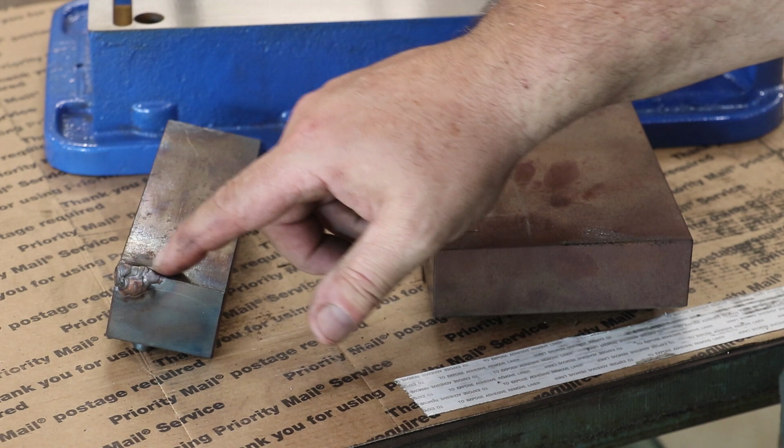And in the meantime, we're going to get back on and start working on getting these things cleaned up. Let me zoom you in here and show you what it looks like with the job finished. So on the fixed jaw here, I think we had where a milling machine cutter had gotten into this, so Jim built that up, and you see he left plenty of material for me to take off. He didn't want to have any voids or anything in there.

We had a little drill hole here, he plugged that up, and then over on this side again, we had some places where a milling machine cutter had gotten into it. This one is some kind of steel. This jaw, the movable jaw, had, I think, a hole in it back over here. We counterbored that and filled it all in, and then also filled up some places here.

I also have just a real light milling cutter mark here. I told him we weren't going to try to fill that in, because once I get all this back on the vise, I'm going to grind the tops of these flush with one another. And I think we will just grind this down and actually grind that out to get that cleaned up.

So next step, what are we going to do? I could take this over to the milling machine and kind of knock most of that off. But quite honestly, I think we're just going to do all this over on the surface grinder. It's going to take a little bit extra grinding, but I think that's just what I'm going to do. So let me get this over here on the surface grinder, and we're going to start cleaning these up.

First thing I want to do is get the two faces parallel with one another. Then we will work on getting the sides done. The sides need to be fairly square. I don't know that it's absolutely critical that they're dead nuts perfect, but we want to get them as close as we can.

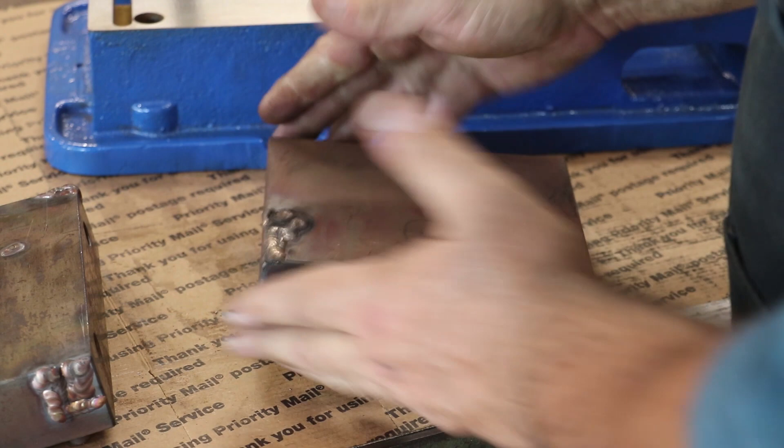And then of course the top we'll do on the vise. And same thing over here. We will get the two faces parallel. We'll get the sides done, and then the top we'll do over on the vise. So I'm gonna go set this up on the surface grinder and do some more grinding.

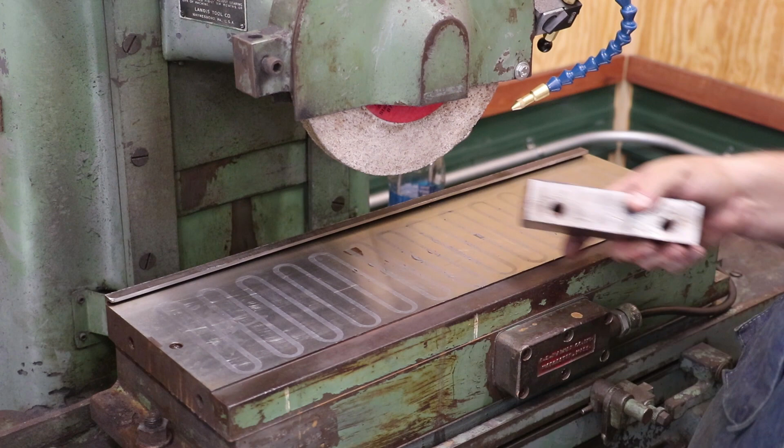All right, we're back over here to the surface grinder. I've got the fixed jaw, and first thing I did was I took a stone and stoned this down, and there were definitely some dings in here. And I just made sure that I stoned it until I was getting good contact all the way across. You know, that just kind of took off some of those burrs that were on here.

My magnetic chuck is clean. I'm just going to bump this up against the fence in the back and turn the mag on. And this should be ready to go. So we'll come in here and touch off on it and start grinding. Let me oil this thing up and get it ready to go.

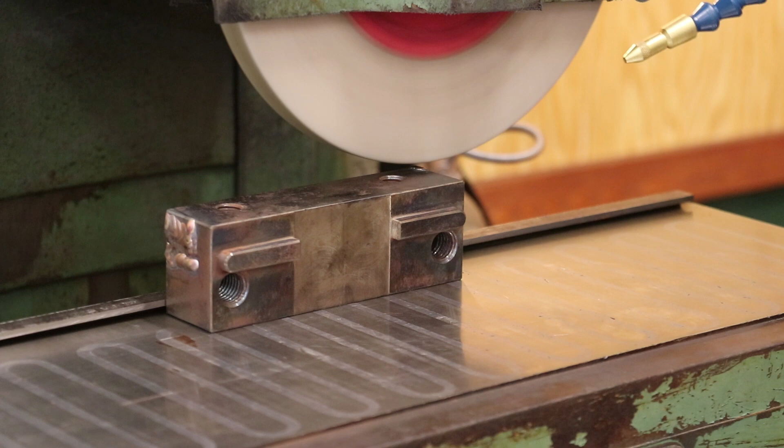All right, we're gonna start by just hitting that high spot there, which is where the weld is. It's gonna come down until I'm just touching it right there. Turn on some coolant here. And we're just gonna probably do this part by hand here.

I'm not hitting anywhere else on here yet. And now I am. I appear to be. Alright, we're touching all the way across now, or pretty much all the way across.

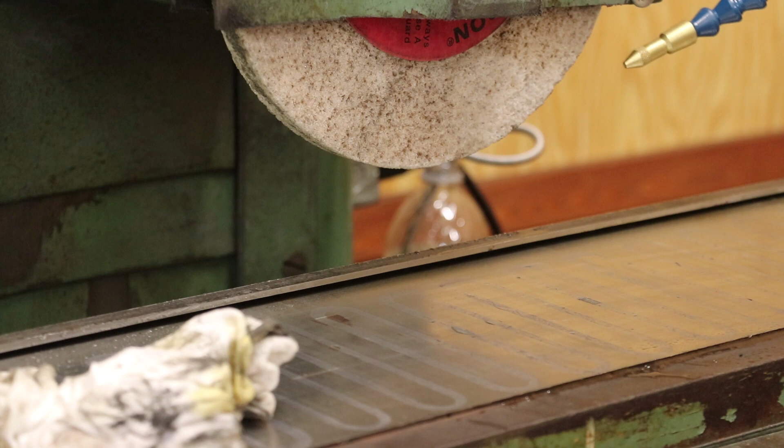Flip it over now and grind it parallel to the other side. And we'll come in here. Mag that on, and we should be able to start where we left off. I'll just make a pass there, and then we'll just get that ground down until it cleans up.

Happy with how that is. There's a couple little scratch marks in there, but I'm not going to worry about them. So I'll just go back across that and let it spark out. All right, I'm happy.

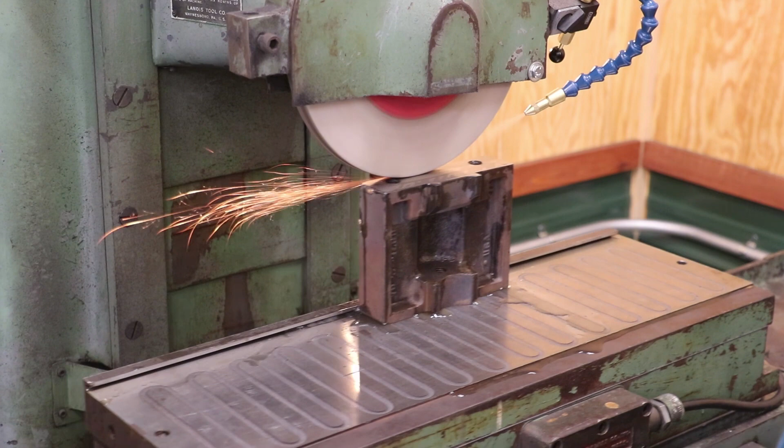So now we're going to do the movable jaw, and it gets the same process. The other side's been stoned, chuck's clean, put it down, and we'll just do the same thing here we did before. I think that pretty well got it, so we'll just spark back across there.

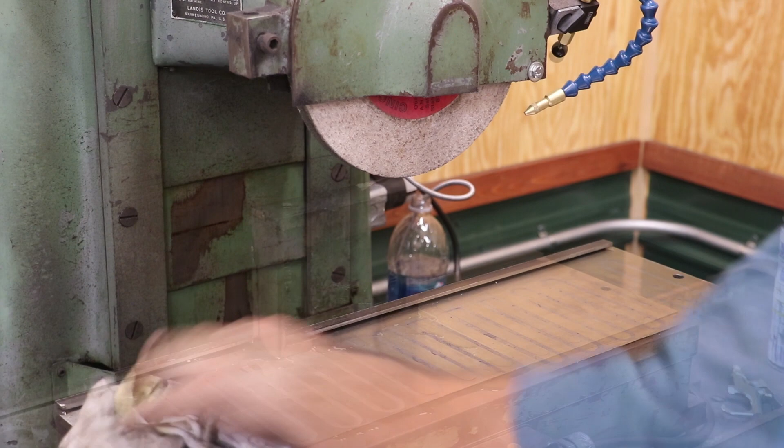Well, we've been doing some grinding off camera, but I've got all four sides of both of these all ground flat and square. Same thing with this one. I'm not going to do the bottoms. They're pretty much original surfaces, and the tops we will grind once we get it all on the vise.

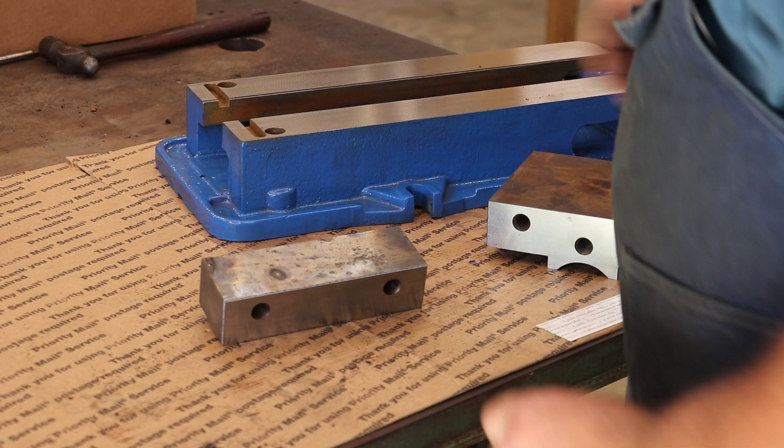So this is getting ready to start to go back together. So my fixed jaw will go there. My movable jaw, actually I think it'll go this way, but it's really coming together. So I got my rebuild kit in. Let me get that all put out here, and we will start reassembling this. I think we're going to go ahead and start putting this thing back together.

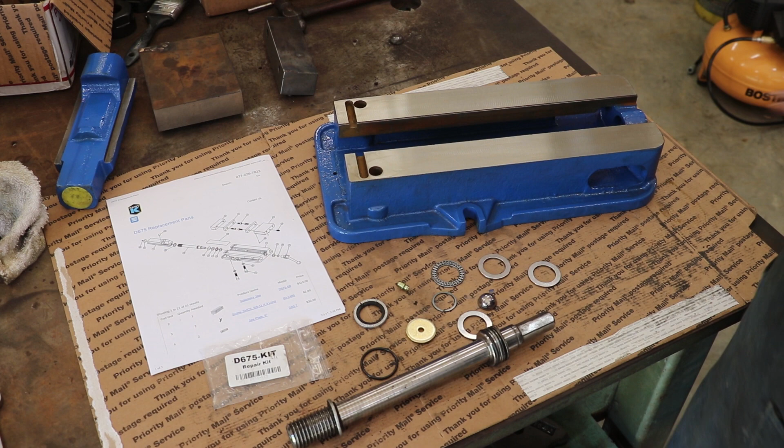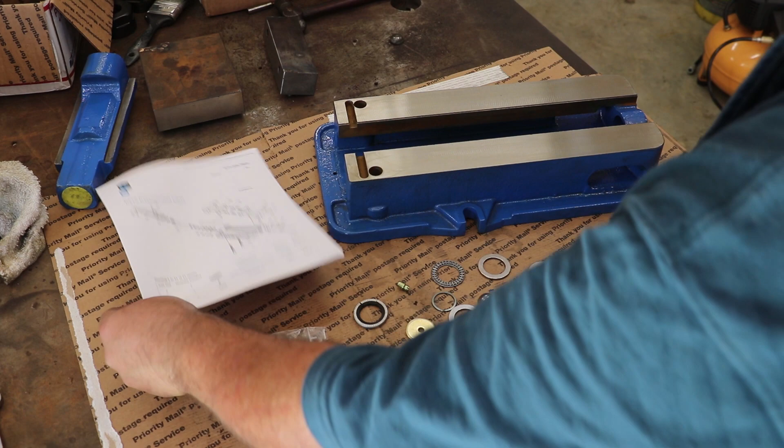I will mention that I went to the Kurt website. I ordered the repair kit, which is basically the hardware for the things that need to be replaced when you redo one of these. And I think it was like 15 bucks. It wasn't too bad. I also have a parts diagram here. See, I got one that's blown up. I'll put that one up here. You can kind of see what we're doing.

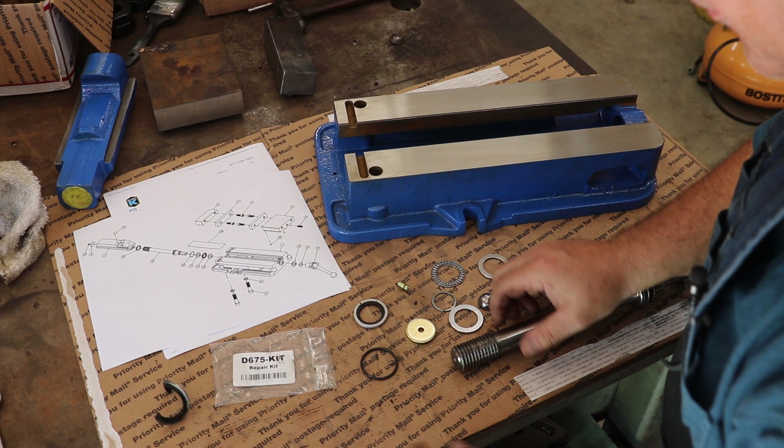So first thing we need to do is get this piece back in. Before I do, there's a couple of pieces on here we need to replace. So there's this little split washer looking piece here that's got a brush in it. I'm just going to pull the old one off. Here's the new one. And let's see if we can get it on here without messing it up too bad. You know what? I think I'll just screw it on here.

Next are the thrust washers, and there's an O-ring on here. I'm going to pull the old ones off. We'll start by putting the new O-ring on. Okay. Now there's a washer here. It goes up on here like such. Then we've got a little thrust bearing that goes in here. And let me grab some oil. And I'm just gonna oil that up real good.

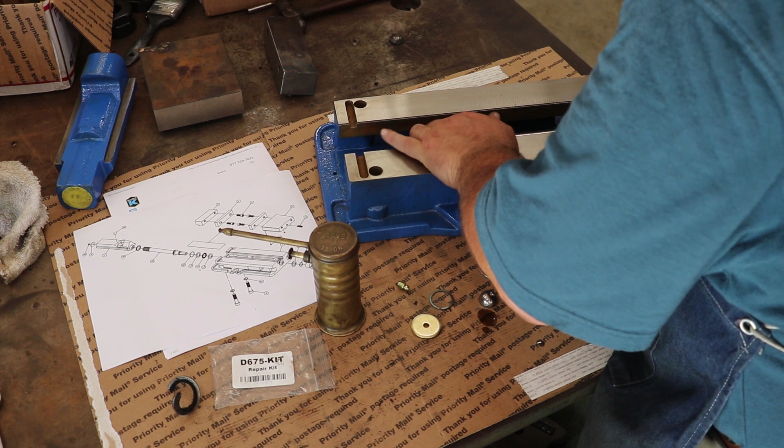And then another washer goes behind it, so that thrust bearing kind of goes in between two washers, and then this whole piece just kind of comes up in here like such. Where's my dead blow? All right, we need to kind of get that O-ring up into the hole there where it goes.

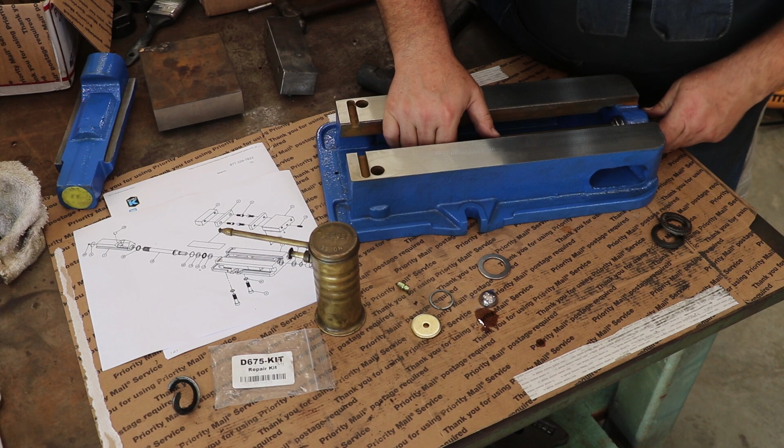It's got to go in there. All right, let me study this a minute. Something's not right. You know what? There's a washer that didn't come out that's up in there. So let me get that washer out. That will explain why it's not going up in there far enough.

I'm sorry, folks, but I turned the fan on. I know people complain about my fan noise, but I see I'm looking over there. It's over 90 degrees out here in the shop today. It's really not that hot, but man, it's just humid as can be. The water's just coming out on me, sweat. So anyway, deal with the fan.

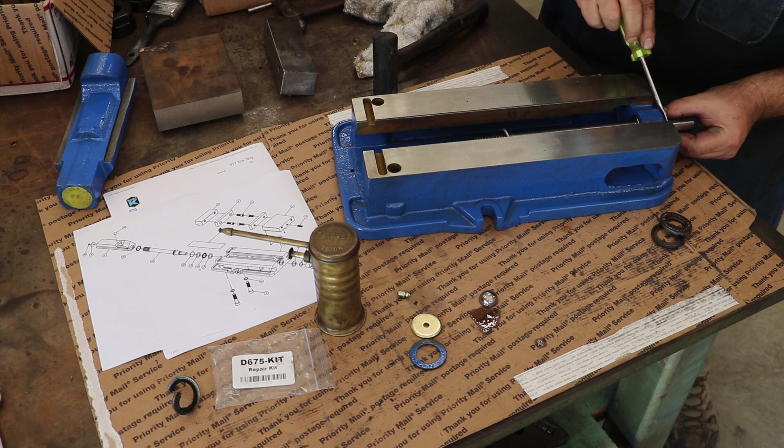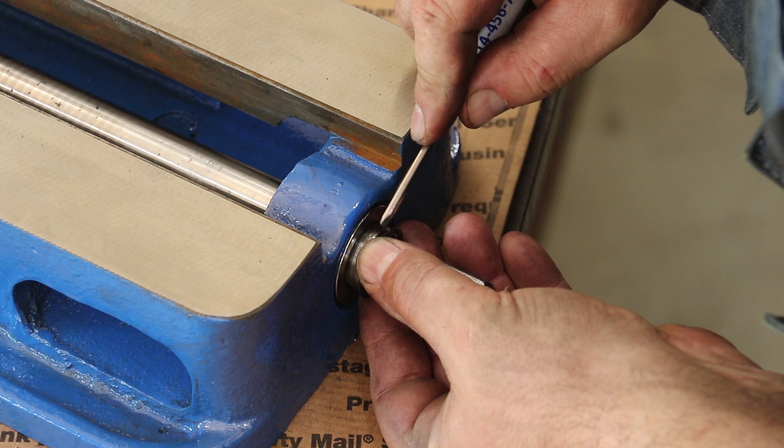All right, much better. So now I can put the washer on the end. And again, this is a spiral snap ring. It goes on here, and I just kind of have to expand it out to get it up into that slide. I think they actually make a tool to install these. I don't have one. I need a smaller screwdriver. We'll move the camera down here where y'all can see this a little bit better. But we'll get that kind of started over in there and just kind of work it around.

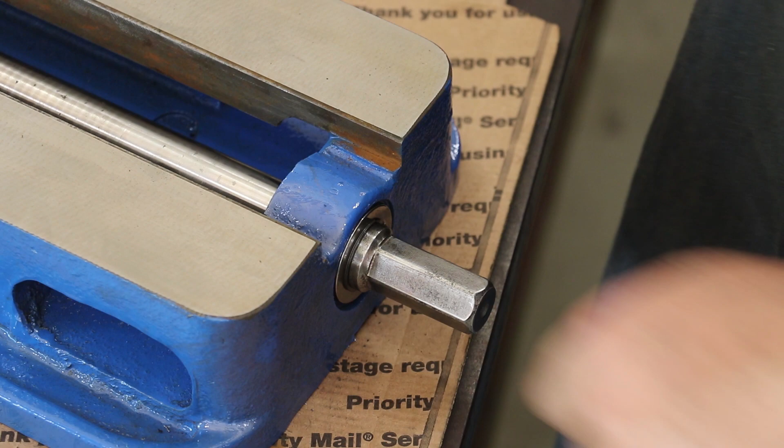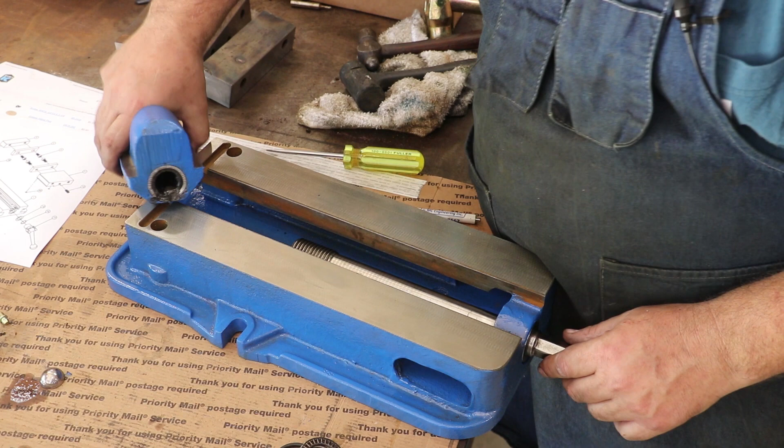All right, that's in there, and that will hold that in place. Okay, very good. So we're ready to install the screw here, or the nut. A couple of comments. First off, that little brush that I slid up onto the shaft, it actually presses in here. I got to look at the drawing and I realized that's what it does. It's got a little nylon brush on here, and that keeps the chips from getting up into the nut, which is actually a pretty cool little feature. And I also squirted some grease up in there to go ahead and lube that up.

This piece slides in here like such. And when I ordered my rebuild kit, I ordered me a handle for this vise because it didn't come with a handle. Yeah, that brush is doing a good job. So I went ahead and just ordered one. Kurt has, I think, a $25 minimum order, and the rebuild kit was only 15 bucks. So the handle, I think it was like 20, 25 bucks or something. I can't remember, but I just went ahead and got it.

Next step here is to put the movable jaw on, and the way this works is you got a little 45-degree angle in here, and I don't know if you can see it, but up in here there's a matching 45-degree angle, but there's a little half moon radius in here, and what you get is this little half ball. It's a little steel ball, and it floats in there so that when you tighten it up, the flat of this ball hits the flat of this 45, and it pivots on there, so you got a nice self-centering. It's going to roll around on that.

Now, one thing people recommend you do to hold that in place is just take a little dab of grease. It also gives it some lubrication up in there. So I'm going to put a little squirt of grease up in there, put that in there like such. And then you just come in here and that holds that in place. And next there is a set screw that goes in the back here and right here, and that basically tightens it up onto that. I'm going to go clean this up real quick and we'll install this little jewel.

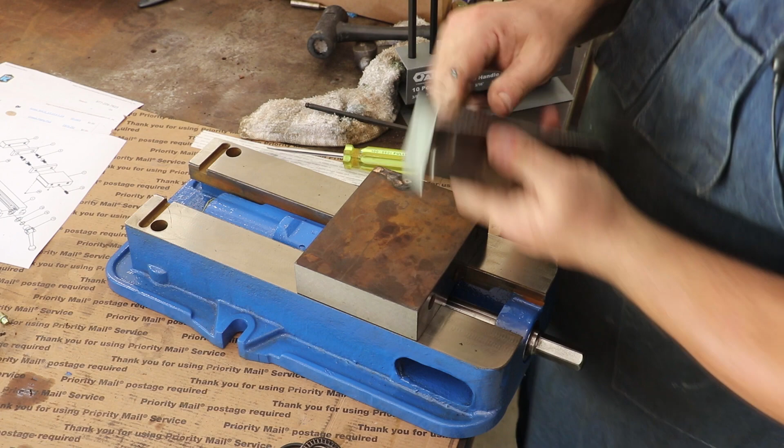All right, that should have that locked down. And there you go. The movable jaw is moving. Just what we want. Very good. Now, we are going to install the fixed jaw here. And what I'm going to do is just put a little oil in here.

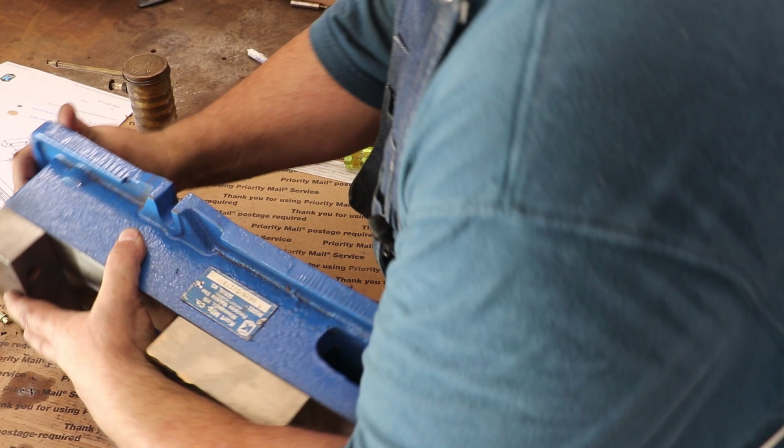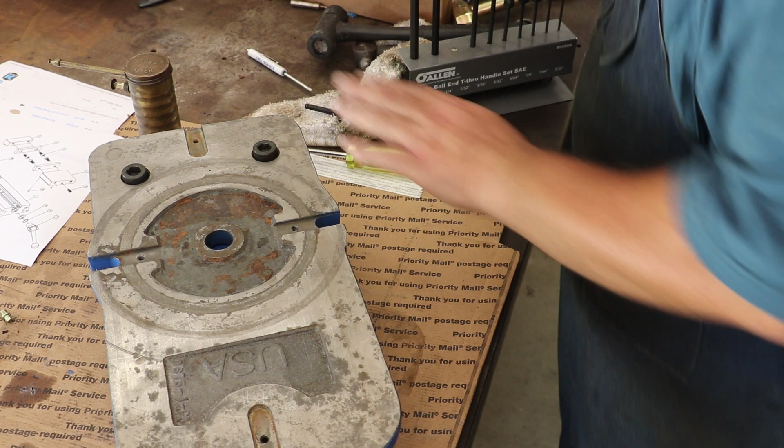And for that, we're going to flip it over. And we got two socket cap screws to hold that in place, and there is a little lock washer thing in the bottom there. And we go get a big enough hex key to put those in. And I think we'll torque them down like such. That should be good. All right, flip it back over. And it is starting to look like a vise.

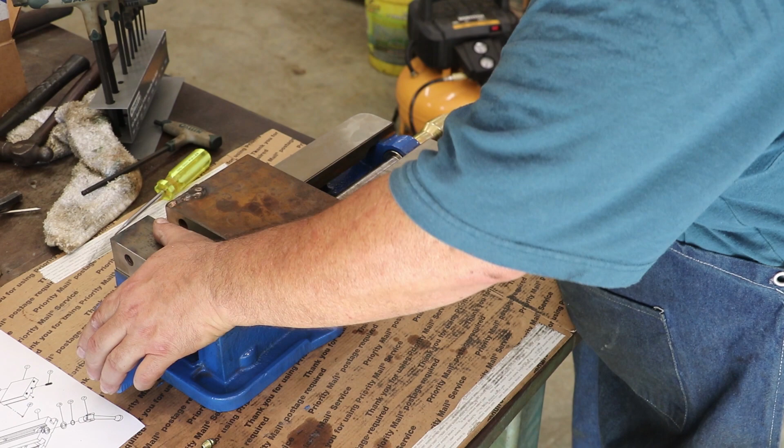So that's as far as it goes without having vise jaws in there. So I think what I'm going to do is I'm going to take one of these vise jaws. We're going to grind these before we put them in here, but I'm just going to put it in here. What I want to do is I want to tighten this up so that when I grind the tops of these, I'm grinding it under pressure, because that's how we'll be using the vises, under pressure.

And the next thing for me to do is take this back over to the surface grinder, and we are going to grind the top down, and we'll pretty much have this vise all ready to go. So let me go get that set up on the surface grinder. Another grinding job.

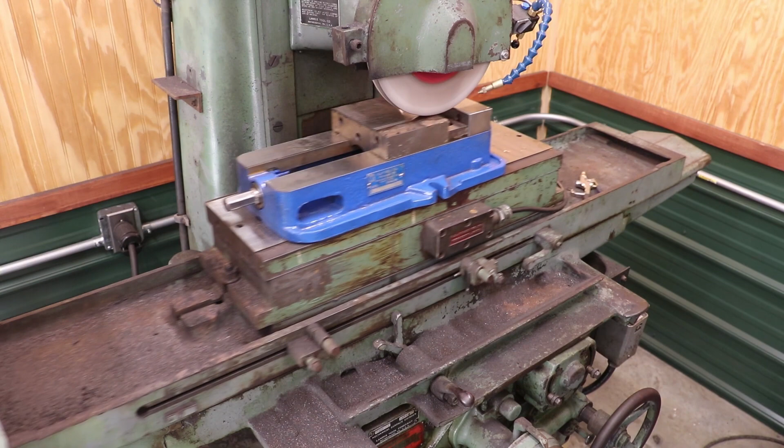First pass done. We're going to feed down another thousandth. Come back across. It actually cleaned up pretty well, except we got a couple of little boo-boos in here we're still cleaning up. And of course, this area back here, we're going to have to go down a little bit deeper to get that worked out. But really just a thousandth pass cleaned most of it up, which tells me it was pretty flat to start with.

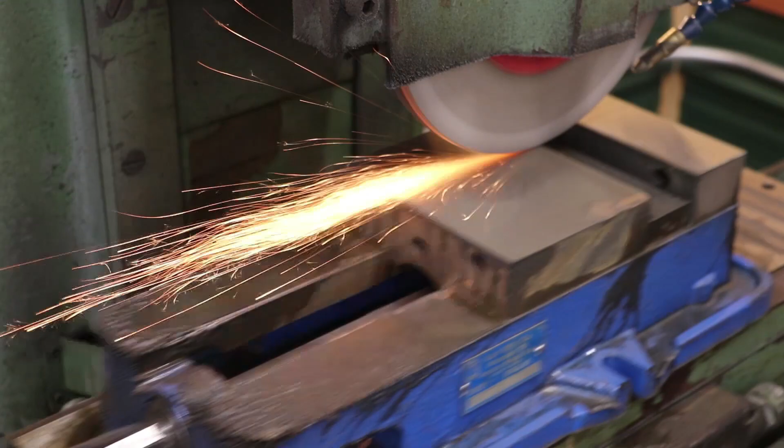Well, we should be taking our last thousandths off of it right now. It took 15 thousandths to get it completely cleaned up. We had a little place over here where a milling machine cutter, end mill had gotten into it, and I just wanted to get all that out. So anyway, 15 thousandths, cleaned it up, and this should be the last pass. I'll probably let it spark back across without feeding it down after this pass. And the finish still looks good. So taking some time, but he's looking good. Almost done.

Well, there you go, off the grinder. Everything's nice and smooth. I did hit the edges here with a file, and I just ran a stone over the top to deburr it, so it kind of messed up the surface finish a little bit, but it's flat, man. It's good. It's fine. So all that's left now to do is I've got the jaws in here, and I want to give those a fresh regrind as well.

Put those on. I'm through for today. It's about 6 o'clock, and my wife's wanting to go out to eat dinner. I'm gonna go take a shower, and probably tomorrow evening we'll get those ground, and this Kurt Vise will be finished.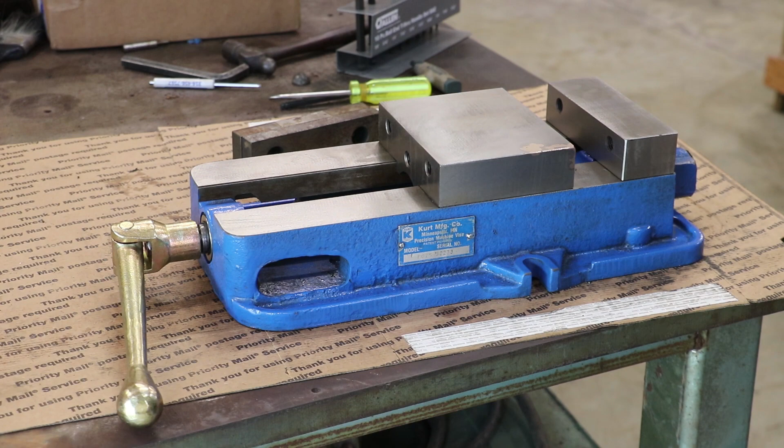All right, I got my hard jaws in here, and we are grinding them down. Had to take about 2 thousandths, probably 1.5 thousandths really, off the first side. I just flipped these over. That's a 1 thousandth pass, and looks like it's going to clean up all the way across. Next, we'll work on getting the edges of these.

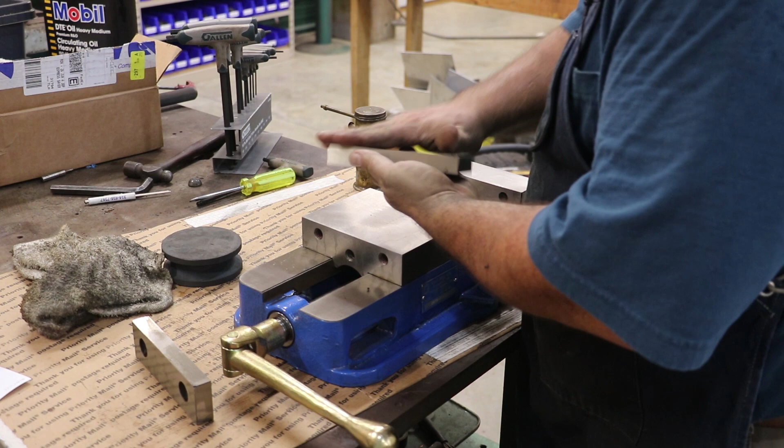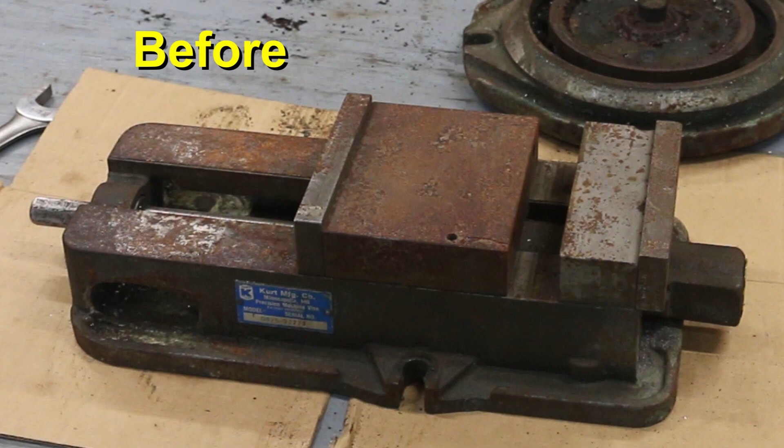Here we go, guys. I got these all done. I put a little light layer of oil on them, so that's probably the discoloration you may be seeing. These jaws fit right in here. Get my socket cap screws going. There you go, guys. One like new Kurt Vise. So I'm gonna call this done. We're gonna put this puppy to use.

The only thing that I'm probably gonna do, and I'll do it off camera, is I think I'm going to grind the tops of these jaws on the vise. You know, I can't pick up much of a difference in there, but feels like there may be just a little bit. So it probably is just 1 thousandth or so, but I'm gonna probably just knock that off. Make sure the tops of those vise jaws are even with one another. But other than that, she's done. Wow, what a difference it makes.

Well, there you go, guys. That'll be a wrap on this series of videos on the Kurt Vise restoration. I think it came out really nice. In fact, it came out nicer than I thought it would when I started on it. The vise was pretty rough looking when it came in the shop, but it looks really nice now. It did come on a swivel base, and I'm not going to do the swivel base right now, but at some point down the road, I'll probably freshen that up as well.

Quite honestly, I think I've got swivel bases for almost all of my mill vises, and I've only used them a time or two. They're not something I use very often, but occasionally you need one. So I may do another one of these vises down the road, and when I do, maybe we'll go ahead and make that swivel base look good as well. But with that, that's going to be a wrap on this video series.